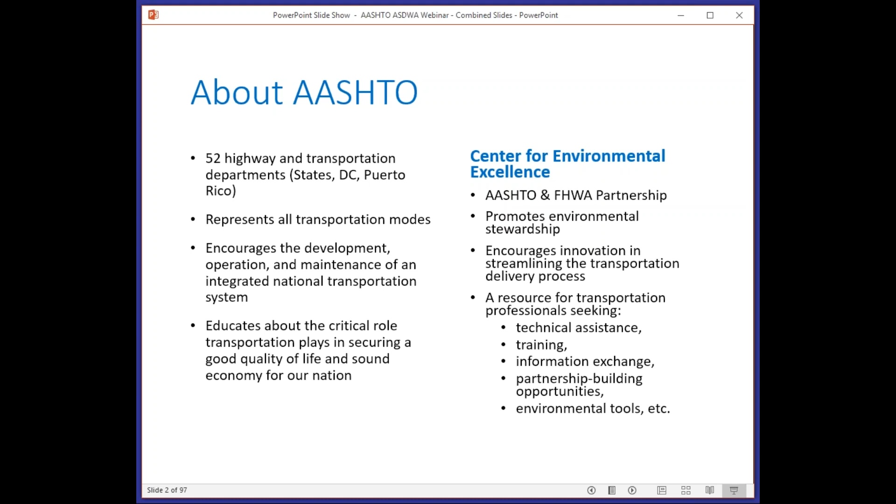The purpose of our webinar today is to provide information to state drinking water programs and state highway programs on how they can work together for mutual benefits, and also to share examples and specific information on best practices for road salt applications and impacts to drinking water.

Quickly running through the agenda for today's webinar: as we're providing this welcome to you all, an introduction to AASHTO, I will turn it over to my colleague, Deirdre Mason from ASDWA, to provide a similar overview of her organization. We're excited today to hear from Pierce Rigrod on the New Hampshire experience, and Caleb Dobbins as well from New Hampshire. And Lee Currey will provide information on Maryland's experience, and we'll also hear from Russ Yurek from Maryland as well.

From New Hampshire, we have Pierce, who's a supervisor, Drinking Water and Groundwater Bureau for New Hampshire Department of Environmental Services, and Caleb is an engineer with the State Highway Maintenance Department at the New Hampshire Department of Transportation. From Maryland, we have Lee, who is the Director for Water and Science Administration at the Maryland Department of Environment, and Russ is the Director of the Office of Maintenance for the State Highway Administration within the Maryland Department of Transportation.

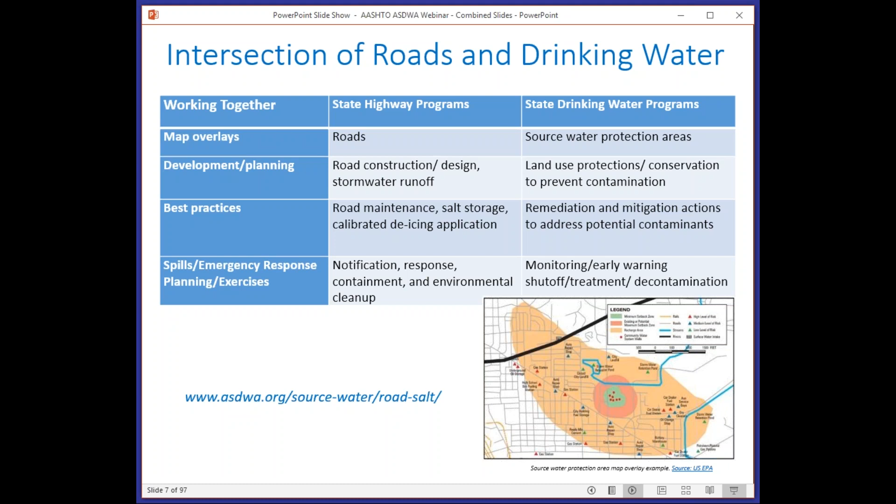This table is also in our handout and webpage and looks at road salt impacts using the multi-barrier approach to ensure safe drinking water. The multi-barrier approach includes source water protection, drinking water treatment, distribution system delivery, and community involvement.

I'm not going to go into details on these since this is what you'll hear from our presenters today in New Hampshire and Maryland, but please do check out our webpage that also includes additional resources.

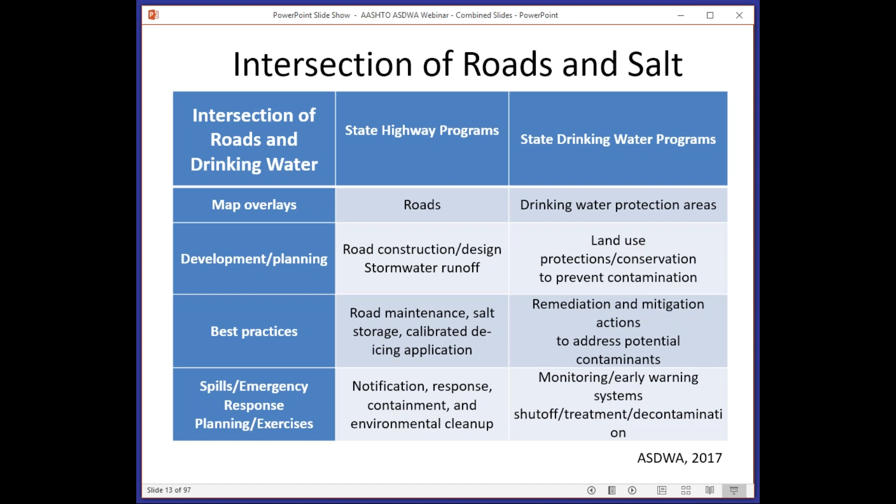So as Deirdre mentioned, there's a number of these intersections that take place that our Bureau and the New Hampshire Department of Transportation are already engaged in. We swap and trade map overlays electronically during project reviews. We're involved, to some extent, with road design and construction processes, and with local and municipal bodies that handle land use regulations applying lower salt or no salt zones near drinking water, on a voluntary basis. Best practices and spill control planning and exercises are also done, at this point in New Hampshire, on an as-needed or voluntary basis. But those are all things we touch upon to optimize our salt use and protection activities near sources of drinking water.

Next slide, please. Just to take a minute, we all know the impacts of chloride and sodium, from vegetation impacts to corrosion of appliances and infrastructure, surface water impacts, and in New Hampshire about 60% of our population uses groundwater. That's in areas with a lot of road networks, which can be even more of an issue in managing salt applications over winter and keeping chloride levels low.

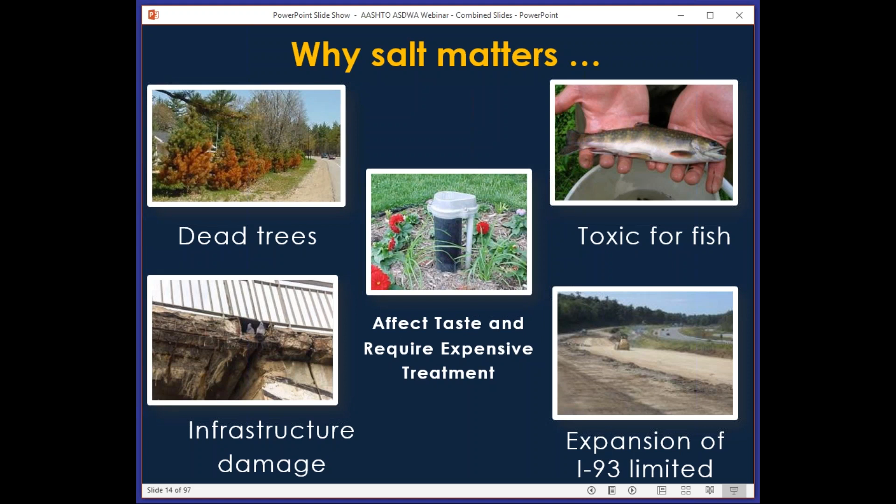Next slide, please. So as I mentioned, it's a health issue and a cost issue. For drinking water, we have standards and health advisories recommended by EPA, including 20 milligrams per liter for people at high risk or on low sodium diets. There are issues with taste, and having to implement treatment like reverse osmosis, which is expensive. Chloride is mobile - once it's in the water it can move around. And as I mentioned, it's corrosive.

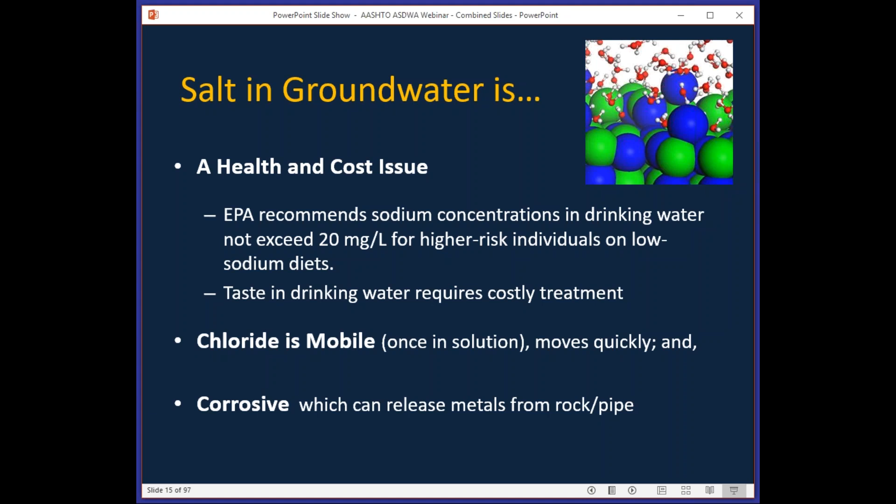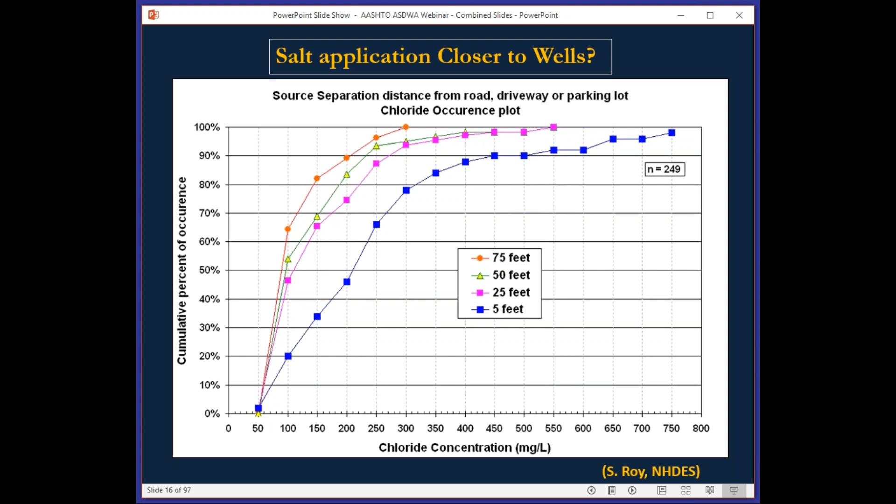Next slide, please. What we know, or think we know, is that as you get closer to a well or source, you tend to see higher occurrences and concentrations of chloride. The thing to take from this graph is as that curve moves to the right and the distance from the source diminishes from 75 feet to 5 feet, you see much higher chloride concentrations in terms of overall percentage occurrence. So the blue line to the right shows much higher numbers as you reduce distance to the source from 75 feet to 5 feet. So proximity matters.

Next slide, please. We can pretty much assure ourselves that the salt is generally coming from roads, but if you look at this pie chart, the takeaway is how big a role private parking lots appear to be playing in salt making its way into groundwater, with relative background levels in New Hampshire of sodium and chloride below 30 milligrams per liter. I think we've really got work to do in the private sector and commercial property, where parking lots are predominant and there's a lot of application going on. In the I-93 studies, that's backed up by work that DOT and programs at DES did, demonstrating that parking lots play a significant role in contributing salt into groundwater.

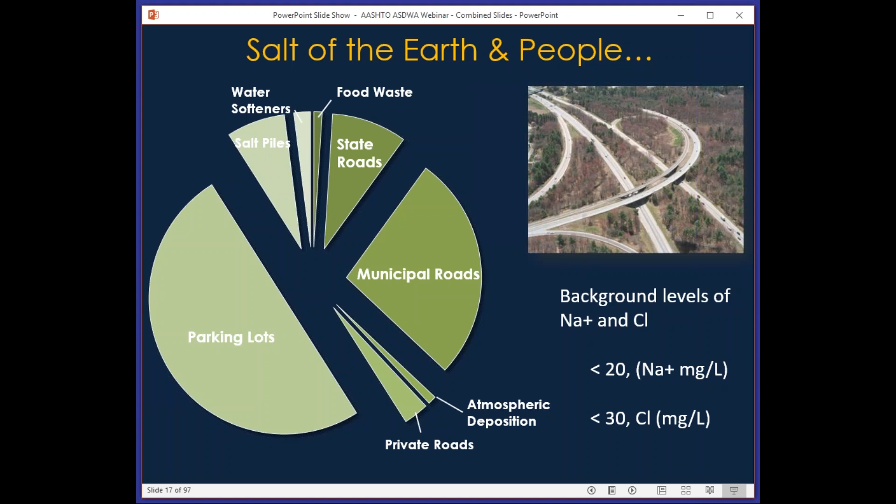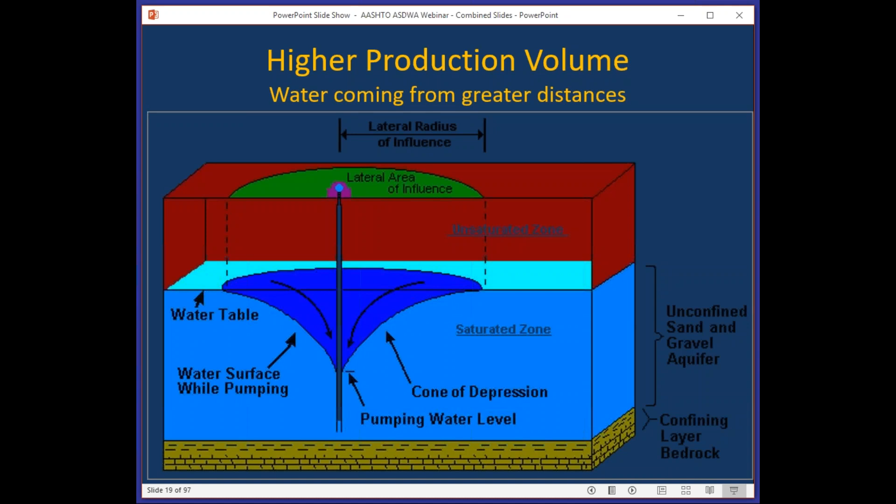to paved areas or to road projects, essentially. So way back in 1995, the Bureau responded to a request from DOT to put together some ideas and guidance on what we should be doing when DOT is working on road projects near a source. The Bureau published this document, which is essentially a series of tiered protections or levels applied to DOT projects. They're not altogether that complicated, but simply a roadmap for how project reviews from DES or recommendations from us during projects would take place. It's essentially a tool we use to screen projects as they come through DOT.

DOT has a fairly regular series of meetings and review processes that take place over a fairly extended period of time. So our recommendations, which include this and other things, go to them and to the project managers at DOT, who then take a look at them.

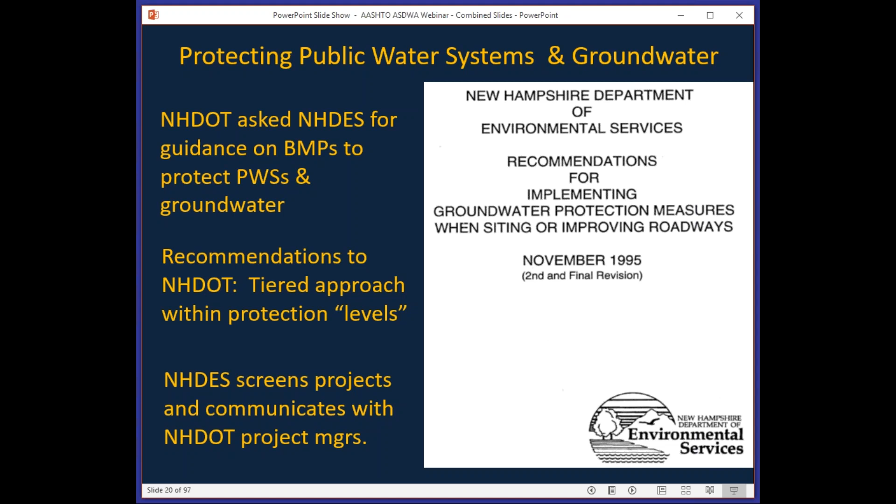I'm just gonna skip through here how these levels break out and try to give you a thumbnail about each one, given the time I have. So really, you're telescoping. Reading left to right, the levels are level 1 through 4 - they're broad, and then they narrow down.

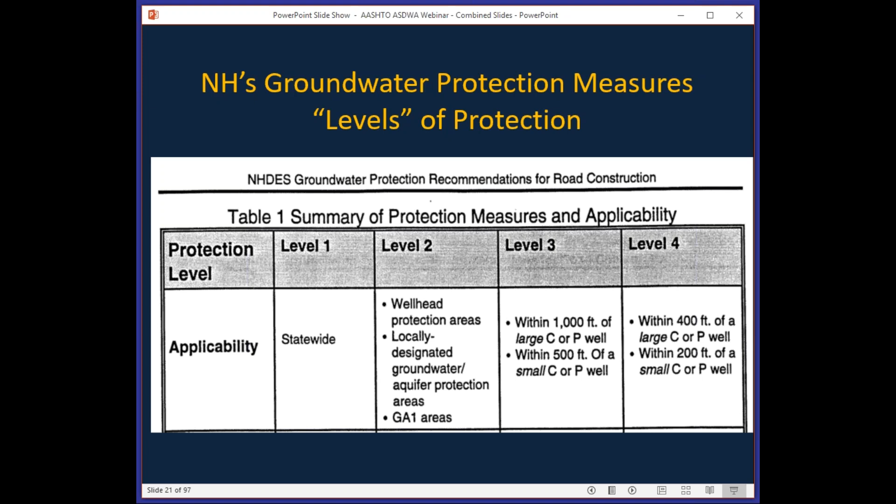The first is basically we'd like certain practices to be in play statewide, and then going to level 2, looking at wellhead protection areas, and then special areas that have been designated as important groundwater areas, and then level 3 down to specific discrete distances within which we'd like certain recommendations for stormwater to be followed, and then down to sanitary protective radii - essentially those distances that are the public health setbacks for sources.

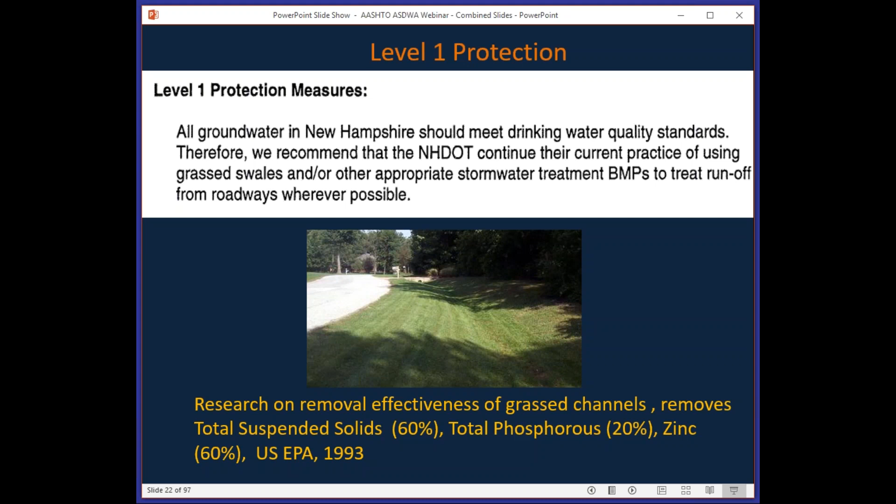Part of these recommendations, one of the initial statements is really just about feasibility. DOT does a lot of work - they're the largest landowner in the state, and they've got a lot of things to do. So this first level is basically, we know that many of the practices that they employ and others employ are already removing things that we don't want to get into groundwater. So for instance, this particular protection level is pretty basic. We're basically saying, use those appropriate stormwater treatment BMPs that you are using that we know work for a variety of contaminants. And of course, this is anywhere in New Hampshire, so we're looking at a very broad area.

Slightly telescoping down a bit, this next level 2 applies to areas that are within wellhead protection areas. In New Hampshire, many of our smaller wellhead protection areas are not particularly big areas - they're basically round circles that represent the estimated area that is contributing water to those wells. But larger community systems have pretty extensive wellhead protection areas that can cover a lot of ground.

What we've added to these, what we're basically recommending to DOT is to look at those most appropriate stormwater practices, which include the things that they already do, and then what we've grouped under something called non-structural measures. These are things like low salt, no salt policies that can be implemented, or perhaps technologies that can be put onboard trucks, but generally speaking, they're not structural. So the idea here is we're now looking at these areas that we know are contributing water to wellhead protection areas, but they may not be influenced at all by the practices going on because of the distances involved away from the sources.

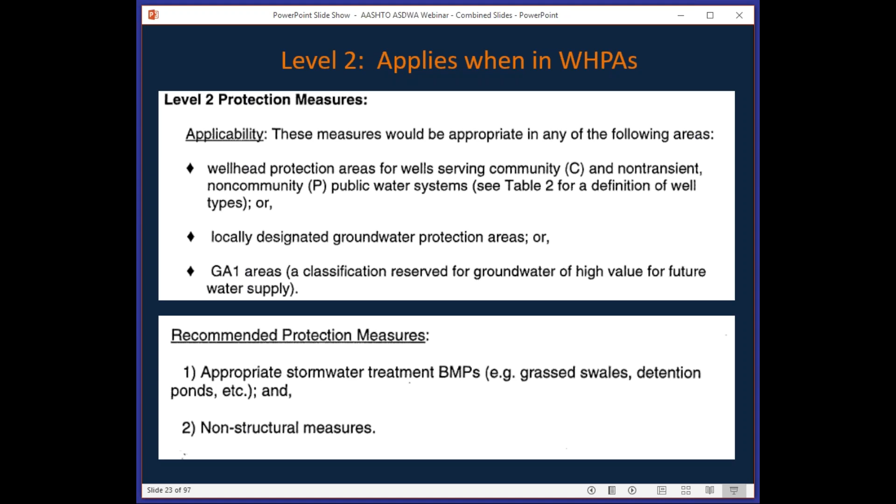We receive that information from DOT. We overlay the wellhead protection areas and the sources. They're color-coded, and it doesn't show it here, but we also know whether those sources have elevated sodium or chloride values that are coded in and change color if there's a higher value that is significantly above the background levels. So as a functional, mechanical process, we do this kind of basic review to determine the level and what recommendations we would be looking at, and then use some other ancillary data that goes into this sort of cursory review.

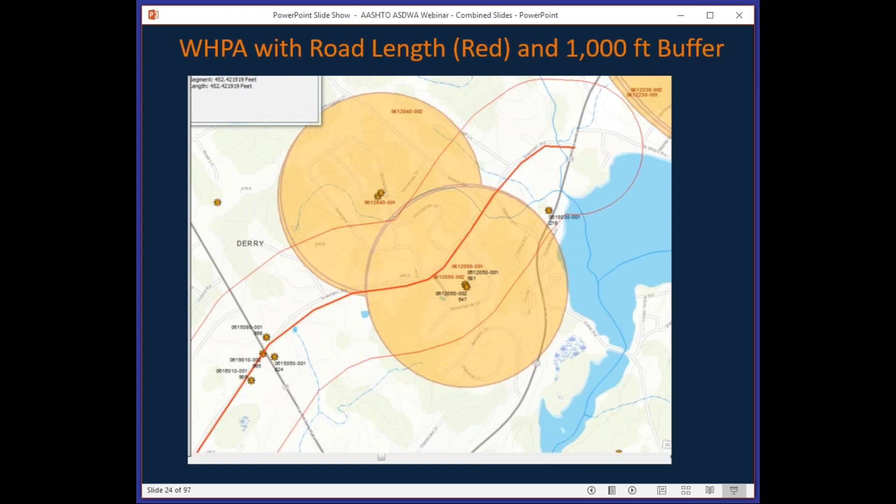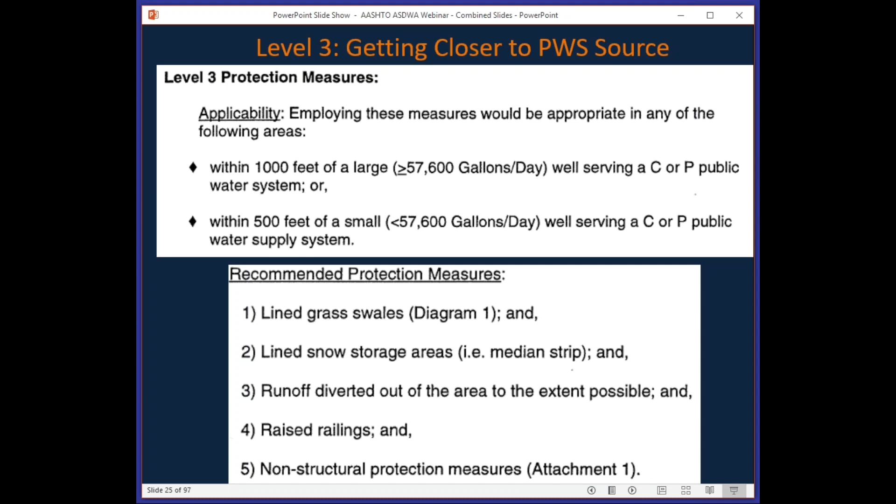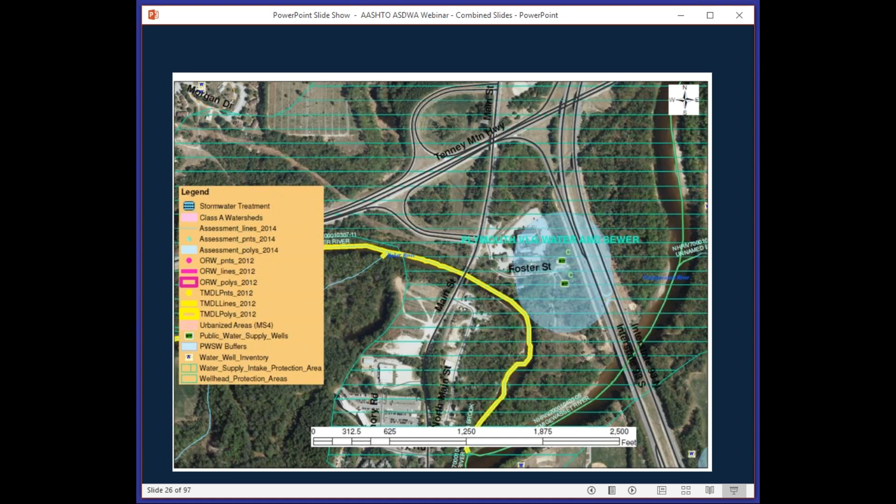DOT has implemented these smart ditch products, which essentially drain the stormwater coming off the main highway and move it out of the wellhead protection area.

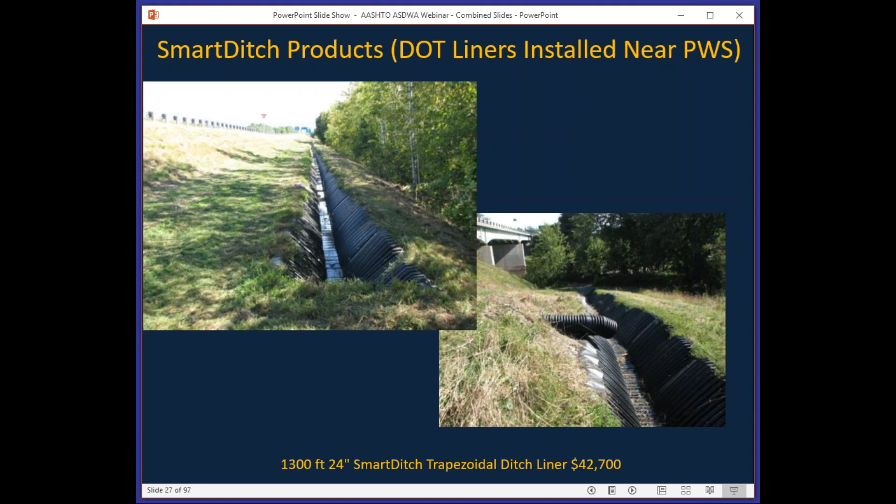Getting down to this close proximity to these large community or non-community systems, we're looking for closed drainage systems, raised railings, and non-structural practices. This doesn't sound all that different, except that the practices are closed. From a structural standpoint, we didn't have many other places to go.

We're basically looking for DOT, when feasible, to put in some fairly significant project practices that are not inexpensive. The underlying objective is that we're making recommendations they actually have a chance of implementing, without putting them in a financial hole where they don't have funding to actually implement.

In these cases we don't have a lot of these projects, since most of the newer sources approved by DES already have these setbacks built into them. So when these things do come up, it's typically with a new road project or an expansion, usually because it's an older well that predates the well siting rules at DES.

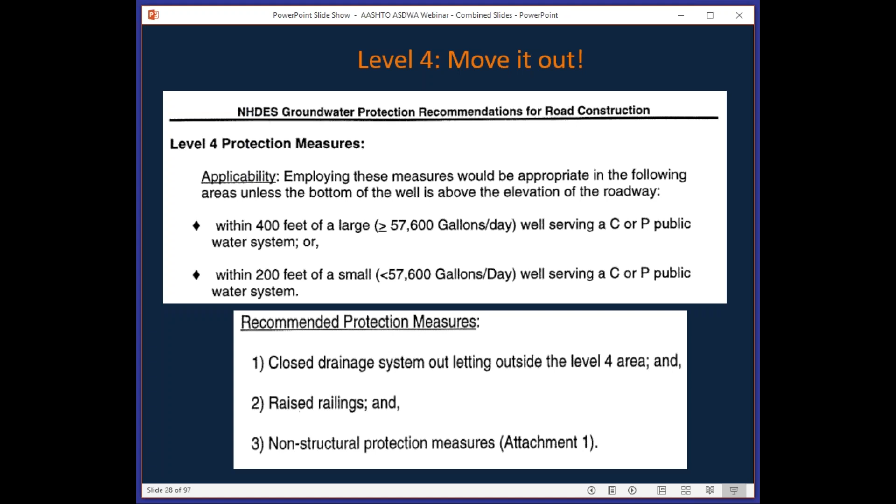Our source water protection program also advances low impact design. The idea is less pavement, less impervious surface, less parking. The design of those sites reduces the amount of parking or related paved areas where you'd see a lot of salt use. We want to move at the community level toward less area that we have to salt, as a strategy for minimizing future salt loading.

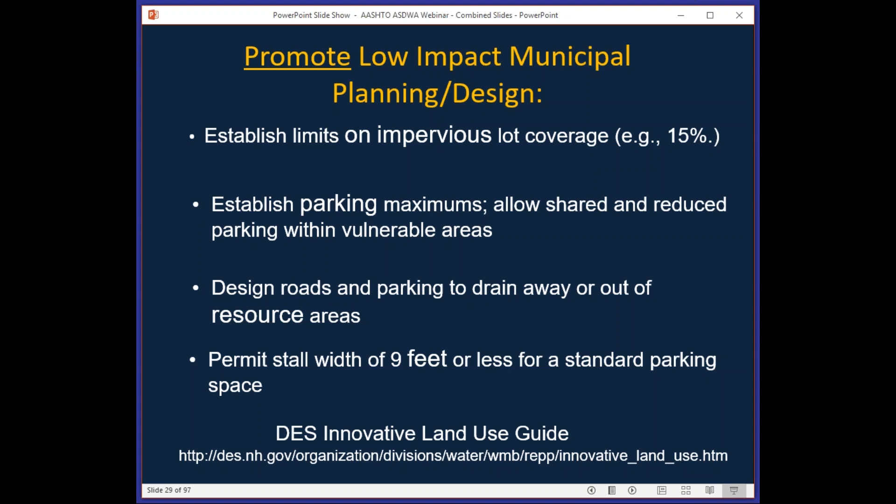DOT has gotten into the act as well. In this particular project in Concord, they've installed bioretention practices and reduced the pavement area draining water from the site. It's good to see the department taking that on, implementing it to both reduce contaminants coming off the site and reduce the need for salt.

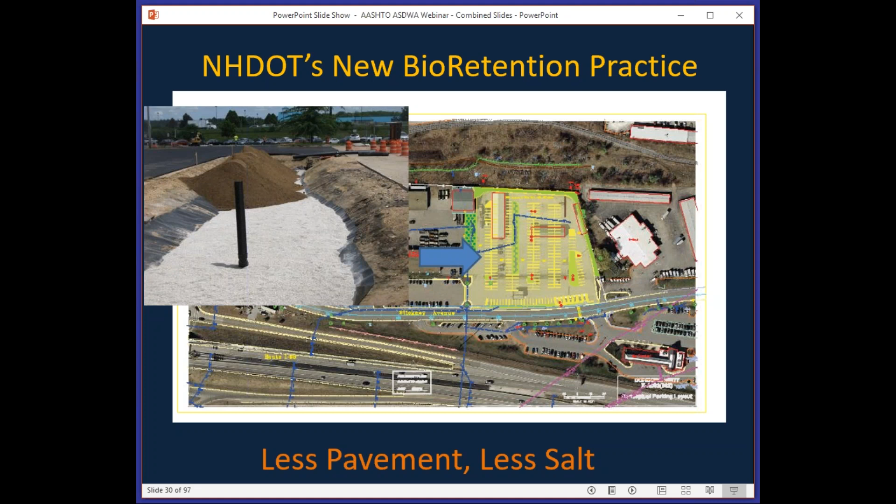I'm only giving you today a narrow window of what we're up to, given the time involved, but we work in a variety of areas with both DOT and others to look at roads and parking areas and how we can implement low or no salt policies, at both the state and local level.

Certain communities like Merrimack and others have adopted these policies, particularly around their water system and wellhead protection area. As I mentioned earlier, the design rules now in place have already built in protections for both public water systems and private wells.

We've been working with our permitting programs at DES for large projects to move stormwater discharge areas and practices further away from private wells and public water systems. We also have a number of pilots involving technology and onboard systems to better calibrate and track salt use as plows move around, to minimize overlap and salt use.

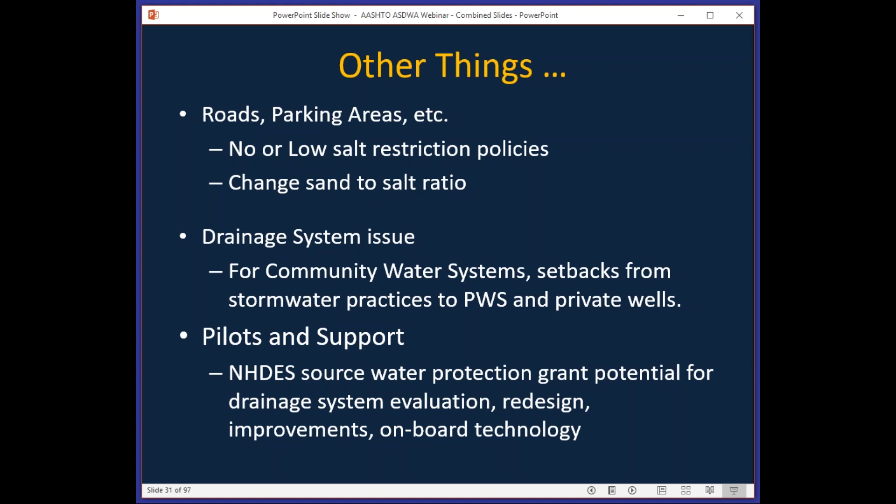And just getting close to the end here, DOT has many things that I'm not going to be able to get into, but we are aware of them and supported them in particular areas, particularly around I-93. It's a very big project, one of the biggest in the state, and has a lot of attention from a lot of stakeholders. DOT has been responding and piloting a lot of things on the I-93 corridor over the last 5 to 10 years. So there's a lot more on the table right now for New Hampshire to use and implement in order to achieve a balance, again, with both salt use and long-term quality of groundwater in New Hampshire.

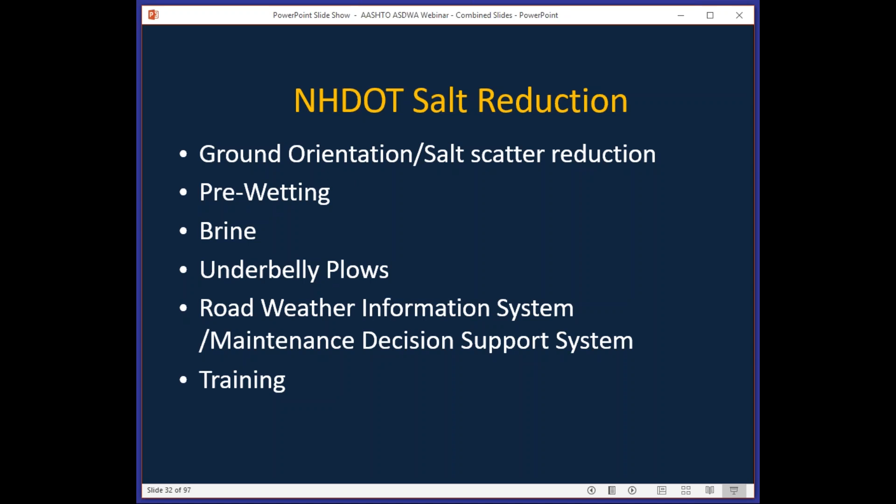Given the time, next slide please. I did put in the slide, but I think we're going to hold questions for now. That's what I have to open it up and lay out some of the issues. But if people have questions about the MOU specifically, the recommendations I've been focusing on in this presentation, I do have a PDF file I can share with the group.

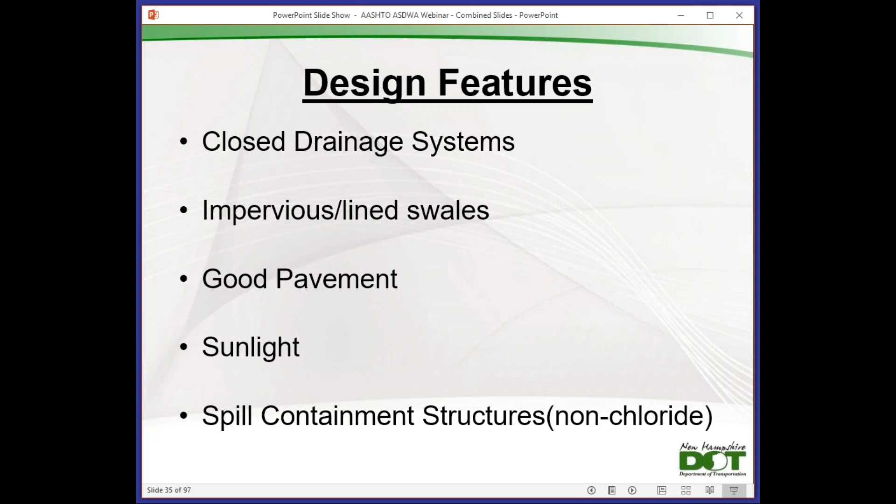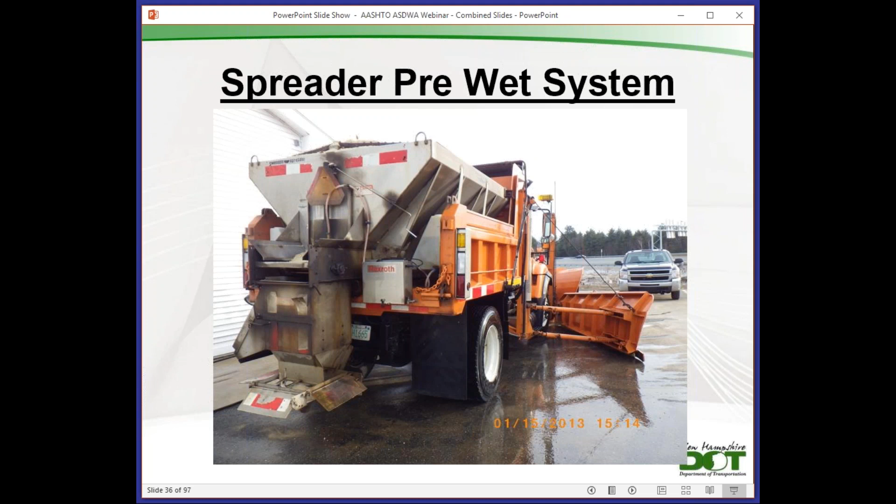So if we can have a reduction, as shown in this slide, which is the effect of pre-wetting your salt - wetting your salt at the spinner - what that does is it reduces the bounce and scatter so that the salt goes where you want it to go. It goes on the section of the roadway that the cars are traveling on, and doesn't go out into the shoulder. Michigan did a study a number of years ago, and it shows about a 25 to 30% reduction in the amount of salt that goes where it doesn't need to go. So that allows you to reduce the amount of salt you're using, so long as you're putting it exactly where you want it to be.

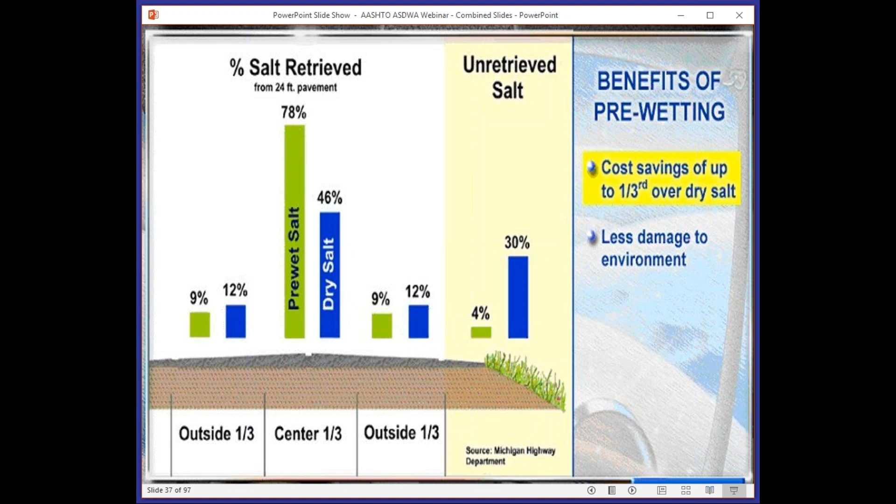In New Hampshire, our practice is not to salt our shoulders. We let Mother Nature take care of that the day or two afterwards, because we don't have the public traveling on the shoulders typically. So we don't have that material adhering to the road, and we don't need to put the salt down to keep the snow from adhering to it because the traffic's not there.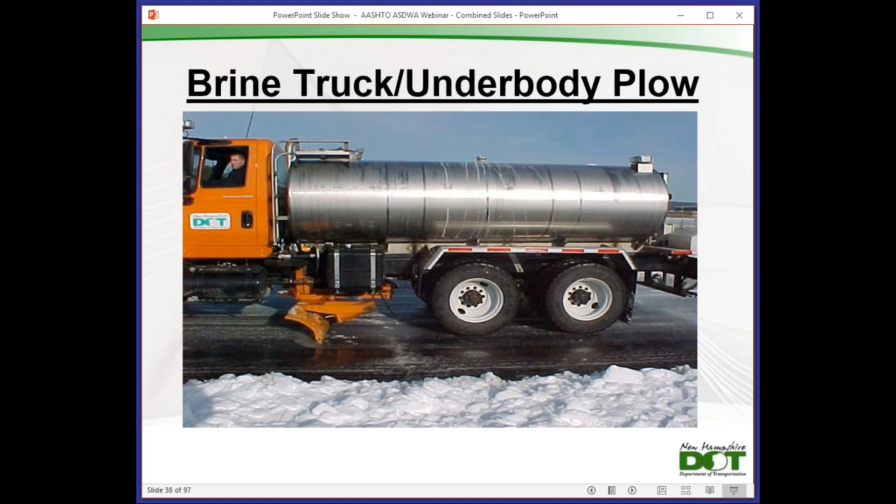This truck shown on this slide also has what's called an underbelly or underbody plow. That allows for an extreme down pressure. So if for some reason it doesn't work out with everything we do before the storm, this truck has the ability, due to the down pressure, to really scrape a lot of that ice off if it does happen to form, avoiding having to go and treat great thicknesses of ice by using chlorides.

Going down from the spreader to the ground, we've also implemented flex plows. There's nothing better than a smooth road to be able to plow, but in New Hampshire, believe it or not, we don't have a lot of smooth roads. So a number of years ago, we started using one manufacturer - there are multiple manufacturers now because people have seen the need and advantage of using these. It's a flexible plow blade. It's not like your wiper blade or anything, but it allows enough movement of the carbide inserts in the carbide blade so that it has some ability to conform to the road.

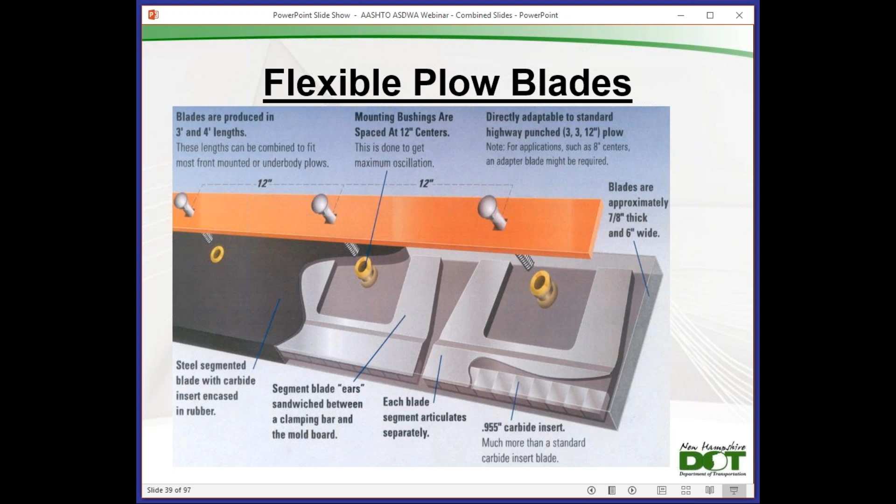The more snow that you can remove from a roadway, the less chlorides or salt you have to apply either during or after the storm. So these have actually been able to reduce our salt usage simply by removing more snow. And as I said, there are a number of manufacturers. Ten years ago there was really one manufacturer, and now I'd hazard there's probably at least half a dozen, if not more, with different designs that do exactly the same thing.

Back in the old days, New Hampshire was the first state in the country to actually directly apply salt to the roadway. We've been doing it for a number of years, and we didn't always use best management practices. As this slide shows, the pile on the top right is a salt-sand mix, from prior to straight salt. It was mixed in December, but it's now March, so that uncovered pile had been sitting out there for about four months. We don't do that anymore.

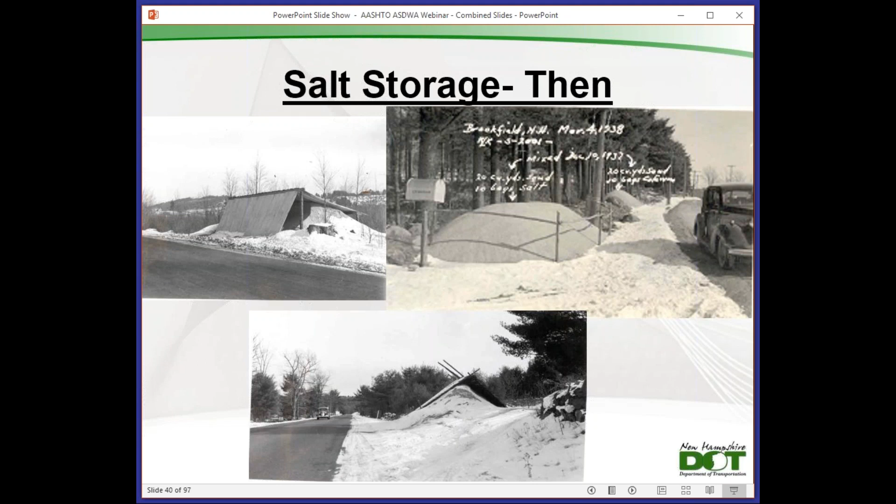This is what we do now. These are our salt sheds that we're building here in New Hampshire. Our goal, and certainly the MS4 and some other requirements coming down the line are pushing us this way, is to put an entire season's worth of salt at each of our sheds under cover prior to the start of winter.

Going back to that three-legged stool, this allows us to always have material on hand to safely treat the roads. It allows us to buy material when cost is lower, during the summer when there's more availability and less demand. And it allows us to reduce environmental impact because it's completely covered, and we can store it months in advance with no environmental impact.

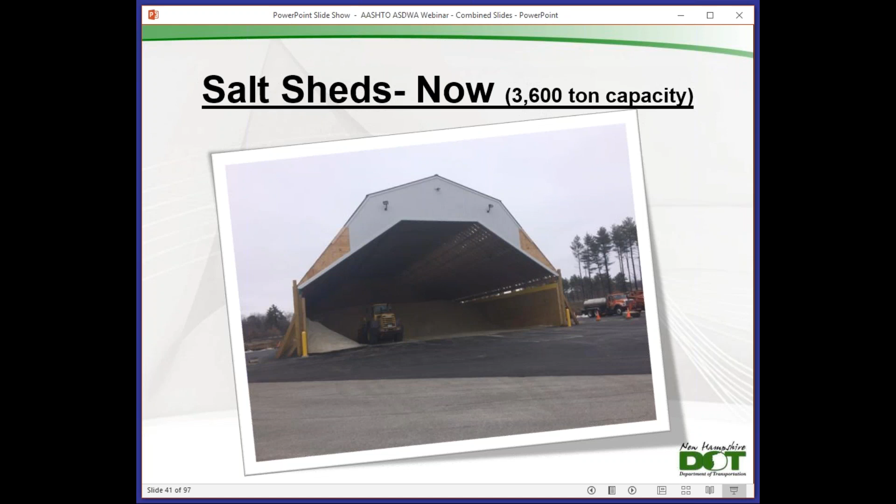This photo was taken in the summer, but as we begin to use the salt within those barns, we gain the ability to do our loading undercover during a storm. That helps with any salt that happens to get spilled at the yard—when it does, it's being spilled in an area that's already undercover.

We also implement what we call road weather information systems—basically weather stations located along the roadway. They tell us things like pavement temperature, air temperature, wind speed, and a number of other things. The newer ones also have a grip factor, which tells you the actual grip on the road, or how good the plowing is. These are important because they tell us what's actually happening on the road.

If you watch weather.com, it's telling you what's happening at like 5,000 feet. This is telling us exactly what's happening on the road, and it's also showing us trends because it's constantly logging data. So our foreman can see if the pavement temperature is starting to climb or fall, and adjust what they're doing according to what's actually going on on the roads they're responsible for.

Pierce hit on this briefly, but we also use AVL, automatic vehicle locating GPS systems. This does a couple of things—it shows you in real time what your trucks are doing. I can click on, on the trucks we have it installed, and see where they are, what their application rate is, whether their plow is up or down. Then at the end of a storm, it can show cumulative data—how much we've applied within a specific watershed.

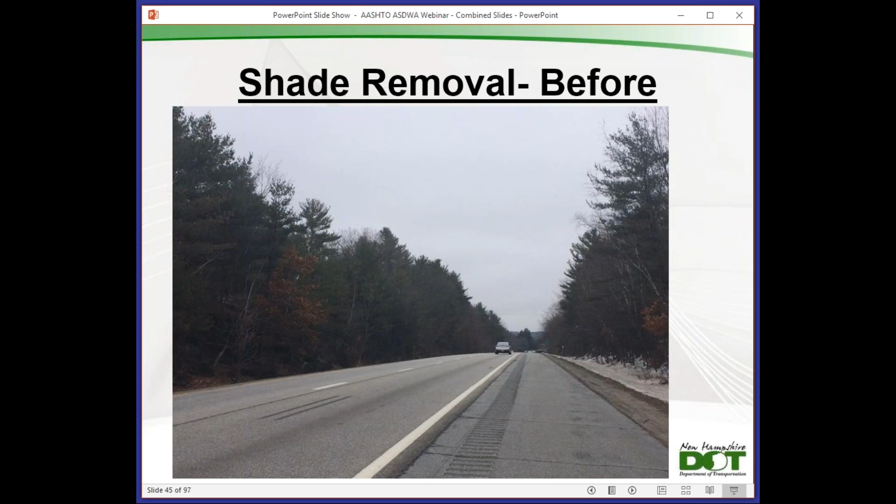And then this next slide is a little bit further down the road, where the section's been widened and the trees have been cut down. Some folks might say this is not truly scenic New Hampshire, but in terms of the chloride aspect, this does a number of different things. Number one, it gets sunlight onto the roadway.

The other thing is, when we talked about bounce and scatter earlier, with multiple lanes, even if there's a little bit of bounce and scatter from say the center lane, that just goes into the lane next to it. So it's not wasted salt—it just may not be exactly in the lane they wanted it. So there's some economy and reduction we foresee just from having more lanes out there. Even if there's a little bit of bounce and scatter happening, it's not actually going out onto the shoulders, it's just going into another lane. And as long as we take that into account when we do our application rates, that will be just that much less chloride we'll end up having to use.

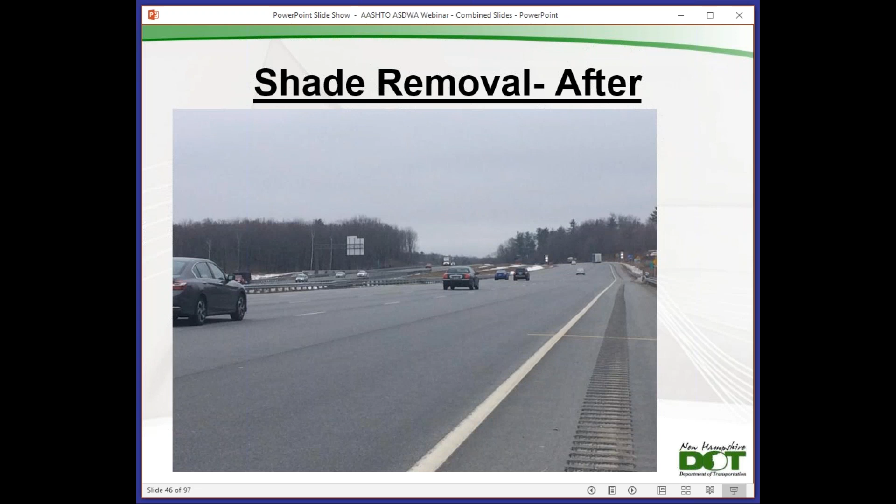Pierce had mentioned we do have a low salt and no salt policy. It's not used greatly, but it's allowed on our lower volume roads, so we look at it, especially in areas where there's some wellheads. There's one town in New Hampshire where we did a low salt right in the wellhead area that they have. Part of it goes back to that safety aspect - we want all the folks that are part of the municipality to be aware and agree as to what we're doing, which includes the fire chief, the police department, ambulance services, and the schools, because those are the folks we're going to hear from. If they're all in agreement and they meet the criteria, the department will designate it as a low salt or no salt, and we will treat it accordingly.

For the cost of 2 signs in this agreement, it goes back to the 3-legged stool in that we're able to reduce the cost of not having to apply it, but it does to some degree affect the safety, though it improves the environment. So it's trying to get all the legs of that stool to be fairly equal.

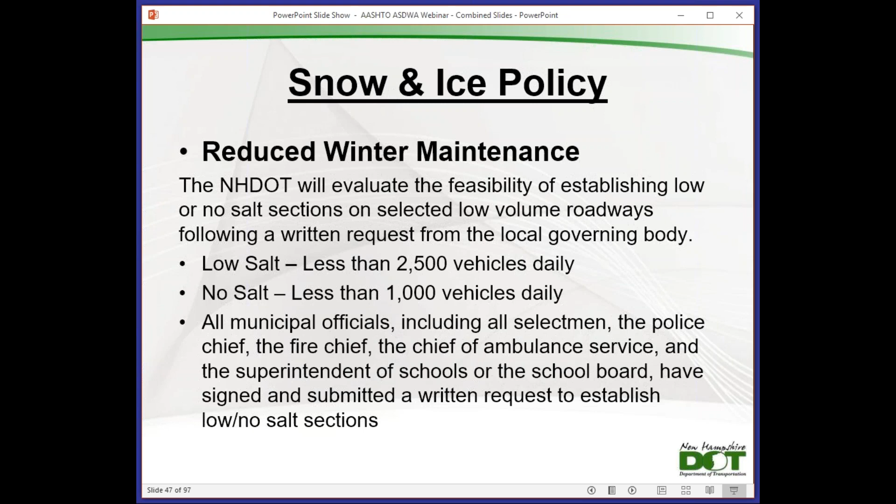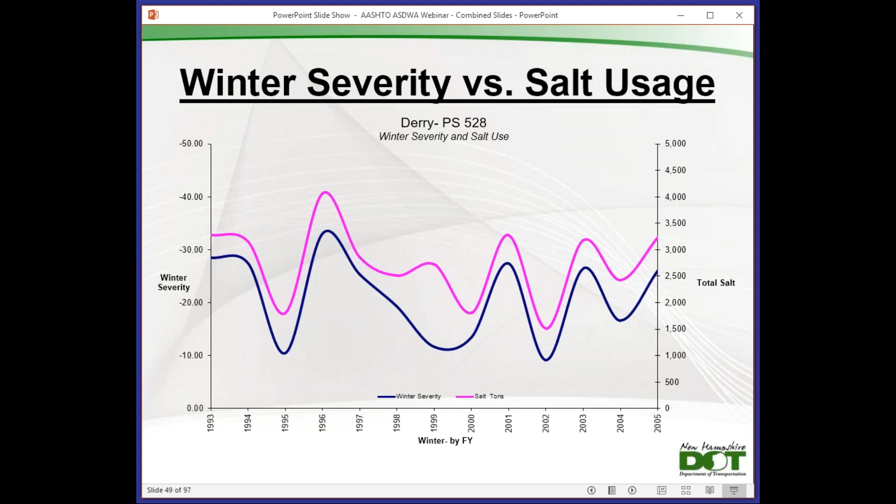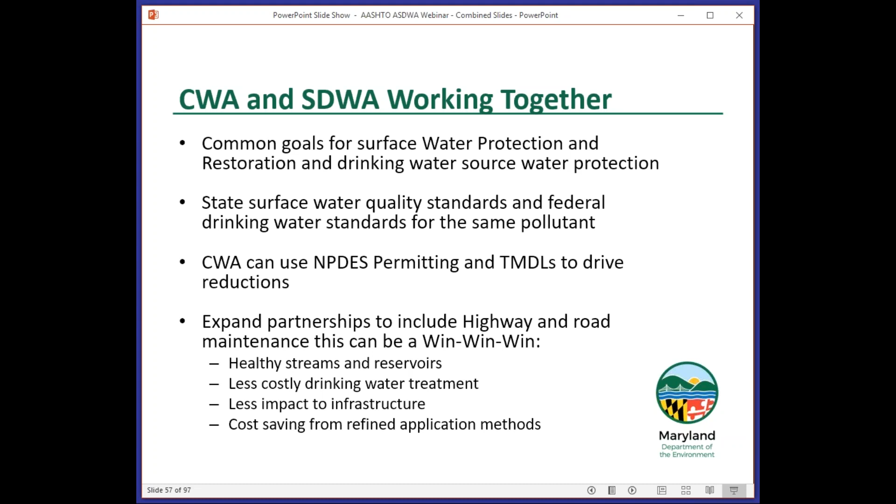Brief overview of the water quality standards. Pay particular attention to that chronic level of 230, and then also look at the US EPA secondary standards for drinking water, which in Maryland we have enforced at times, and those are very similar to the chronic level. So we're both trying to protect these water sources using very similar standards.

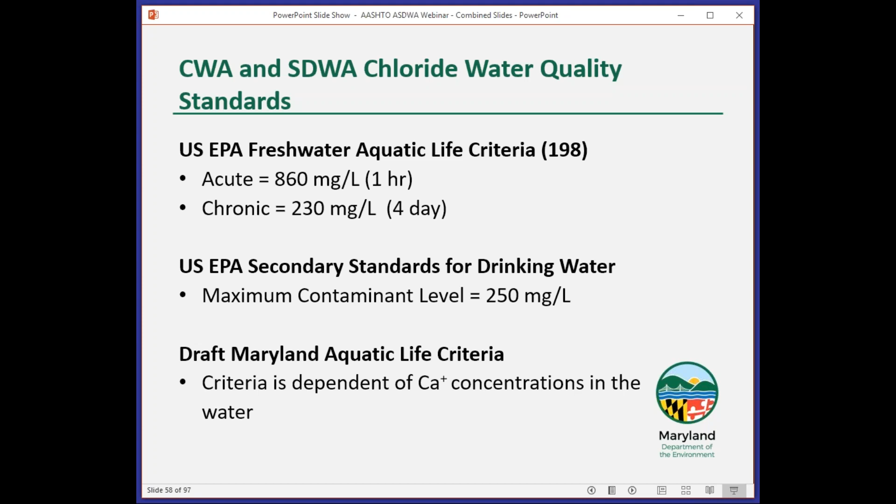Let's talk about some of the impacts in Maryland. You can see from this figure, the red shows our impervious areas, and you can see those highways branching out, extending north and south in Maryland. You can also see there's two large, highly populated metropolitan areas: Baltimore City, that northern piece, and then down you see a little rectangle cut out, that's the Washington, D.C. area.

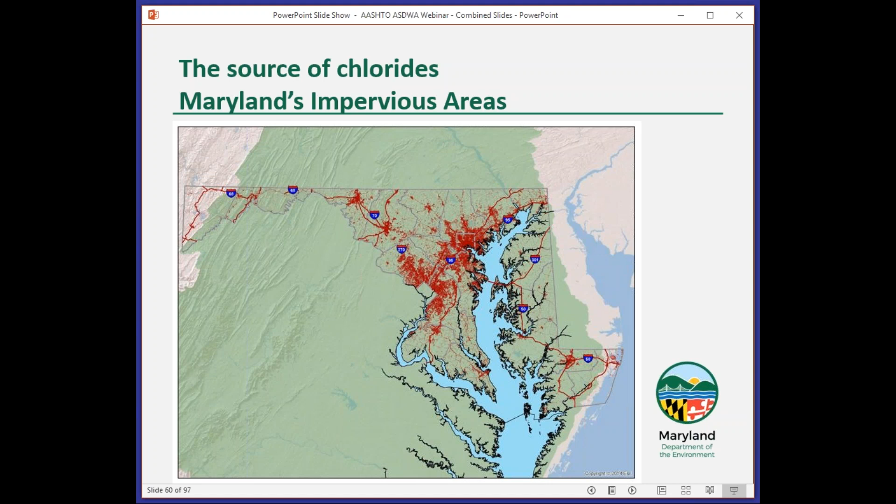In Maryland, much different than I heard in New Hampshire, 70% of our community water systems are actually served by surface water. We have several reservoirs located around the Baltimore region, three in particular. We have reservoirs around DC, and also the Potomac River that divides Maryland and Virginia, where a significant amount of our drinking water comes from. So it's important to recognize the differences when we look across the state on where we receive our water.

Keep in mind those urbanized areas I was just showing you, that red area. The Department of the Environment has identified certain areas of the state that aren't meeting their fishable, swimmable use - really looking at aquatic life impacts. What excites me about this map is I've seen State Highway, through the education talked about in the previous talk, show this map to folks and say, look, this is where we're seeing problems within the state. Maryland has 19,000 miles of streams, and it's important to recognize there are issues with salt impacting the fish. But salt can also impact the quality of our drinking water, and too much can cause some economic harm.

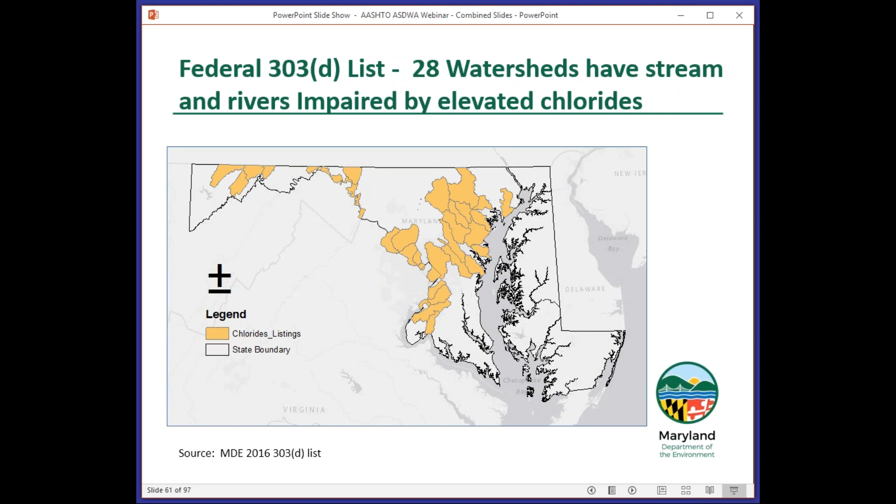When we zero in around the Baltimore area, that northern area I was talking about, this is one of the three reservoirs - it's named Liberty Reservoir. This information shows some of the trends we've observed. This dates back to about 1980, and the data extends to 2010. You see six monitoring stations of streams going into one of our drinking water reservoirs. Note the trends in chlorides - it was relatively flat between '80 and '95, and then beginning to see quite a significant increase.

If you look closely, you can start to see some changes between the 2000 and 2010 time period. But this is important because nonetheless, those trends are still increasing, and it's important for us to pay attention to them now and find smarter ways to manage our roads and clean up our streams and drinking water.

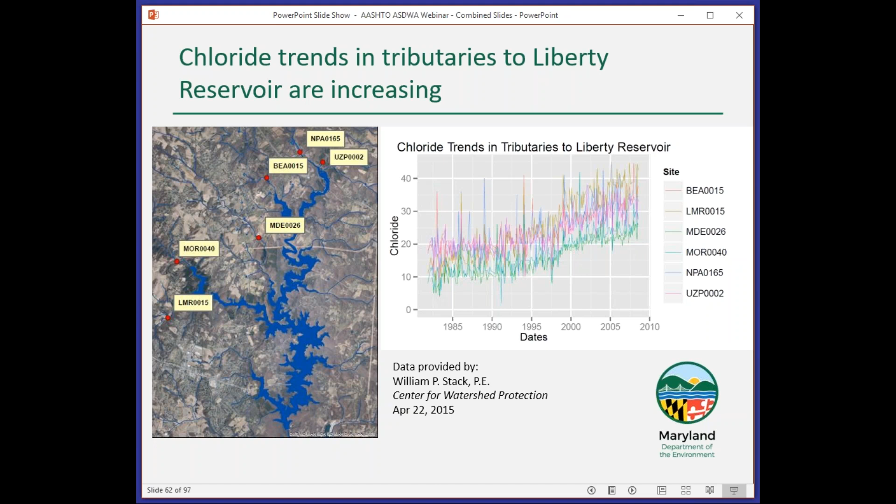So we're seeing these spikes, and I think some folks may think, well, Maryland doesn't get a lot of snow, but keep in mind we have a lot of freeze-thaw cycles. So as soon as we get snow, a few days later the snow's gone, the roads have warmed up some, and the next time there's a snow that comes, we need to again treat those roads, make them safe. So it's a very different scenario that I think Russ will probably talk more about a little bit later.

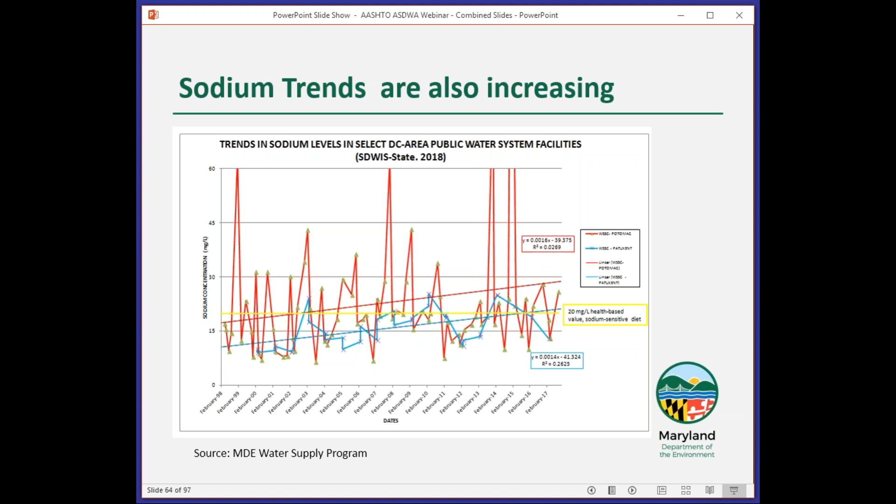Also, it's not just the chlorides. When you think about public health impacts and people on sodium limited diets, the sodium is also increasing. This is some information dating back to the late 90s up till today, looking at the Washington D.C. area public water systems. The red line is water pulled from one of our large rivers, the Potomac. You can see spikes through the winter time, but also an increasing trend. So it's a combination from a public health perspective, we're looking at the chlorides in the systems, but also the impacts for sodium and those on sodium sensitive diets. So those are two of the issues we're paying attention to.

Next. And then the potential drinking water impacts. We've talked a little about corrosivity and the fact that by reducing the salt, you can minimize some of the impacts to our distribution systems, thinking about corrosivity in pipes and what that means. Because of salts, there's an increased need for chlorine as a disinfectant. And then also, keeping those sodium levels low has important health impacts.

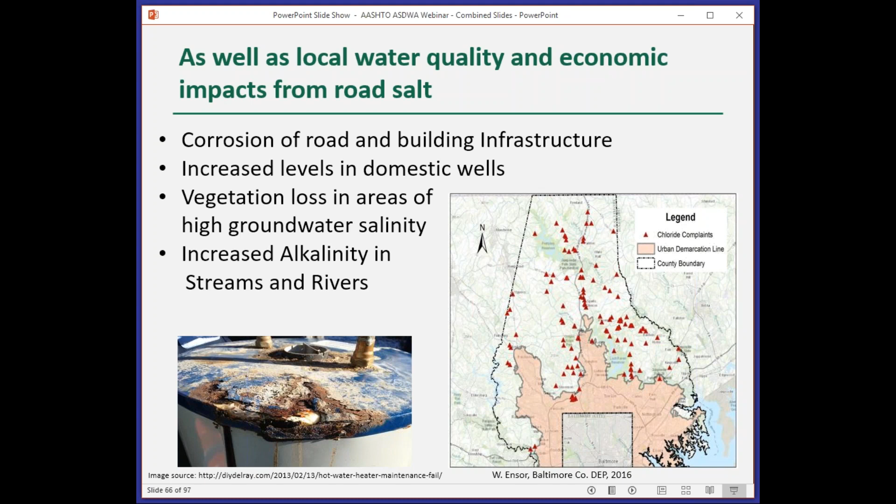And I want to point out one other issue, next please. This is one of our counties around the Baltimore City region, actually Baltimore County. What you can see are those red triangles - that's monitoring information or complaints from wells. This is a complaint from each property owner, and they're talking about taste, and also reporting complaints on their appliances. Again, another economic impact we're seeing and hearing about is people's appliances in their house rusting out sooner, rusting out earlier. So again, how do we manage this? How do we prevent this?

Next, please. So I wanted to go through that series of slides just to give you an impact of what we're seeing in Maryland, pointing out those trends we're observing in the drinking water reservoirs, noting that there's impacts to infrastructure, there's impacts in terms of economics in replacing appliances earlier and having to fix infrastructure earlier.

Then the question becomes, from an environmental agency, what are the things we're doing about it? And it's a little different from New Hampshire. I'm going to talk from some of our larger permitting applications and what we're seeing.

Next. So Maryland's approach: in 2010, our General Assembly, through our legislature, actually recognized road salt as an issue, and they passed legislation for Maryland to develop a statewide salt management plan. State Highway took that to heart, did excellent work, coordinated with us on certain issues and impacts related to water quality. Actually, there's a revised plan that was just put out in October of 2017 by State Highway Administration.

Again, monumental work. But also, within MDE, what we're looking at, and what you heard earlier, is education, education, and education. It's really about how you train folks, whether it's in highway departments, within certain counties, or what's happening in parking lots with commercial application. So it's a tremendous amount of education.

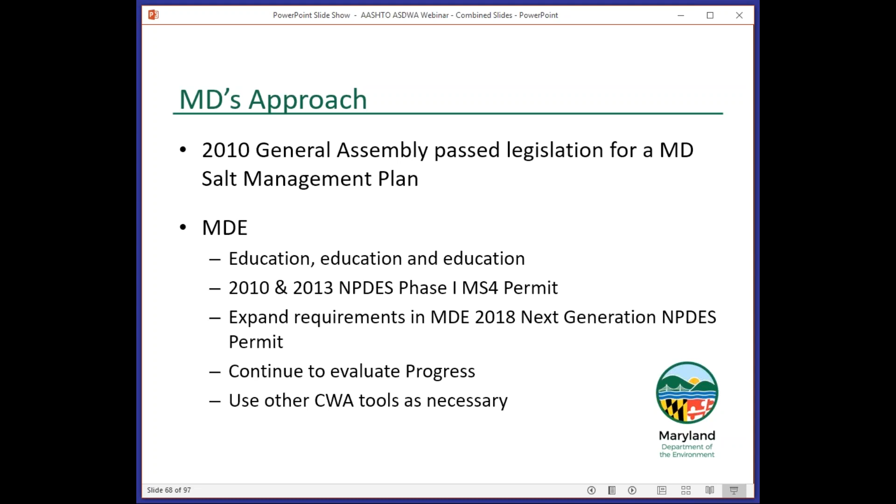We also have these stormwater permits, which I'll talk to you about in just a little bit, where we brought in requirements to understand what's actually happening out on the watershed, and I'll share some of those results. We're expanding those permits within Maryland to better address and go straight to implementation in terms of how we continue to reduce and make progress in keeping the roads safe but keeping the waters clean. And we're evaluating progress, and then I'll close with looking at some other Clean Water Act tools we can use if necessary.

Next. So you can go to the 411 on road salt - this is an MDE webpage. I think it's important to point out the related links, not just the information on road salt, but the salt management plan I talked about, Maryland State Highways, sensible salting. You can see there's a tremendous amount of information that we share. Every winter, we make an effort to go out and educate folks and make sure this is available to people in terms of the importance of managing road salt.

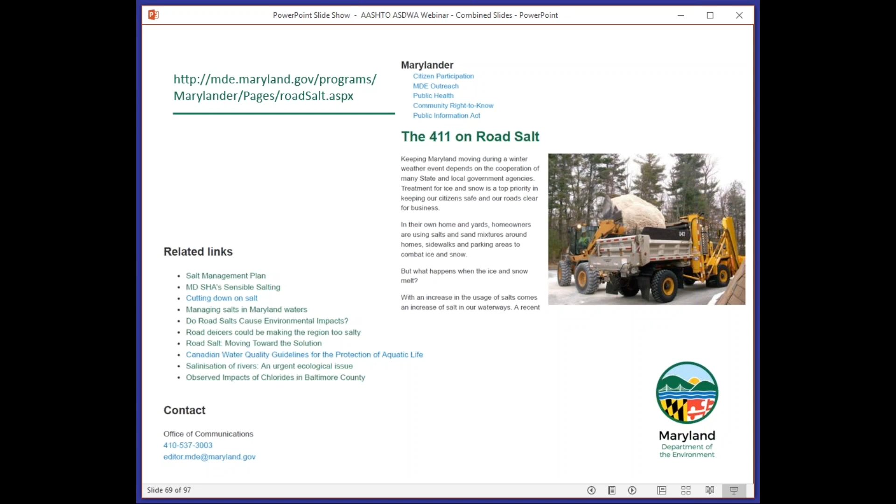In Maryland, our stormwater permitting is set up somewhat differently than other states. We have very strong counties in terms of how they manage land use and make local decisions. The shaded area on the map is covered by what we call an MS4, Municipal Separate Storm Sewer System permit. We have 10 counties covered by this permit, and one of the permit responsibilities is to manage and continue reducing road salts and de-icing materials. In addition, our State Highway Administration has a permit, and all the roads in Maryland under this shaded area are also covered under that same permit.

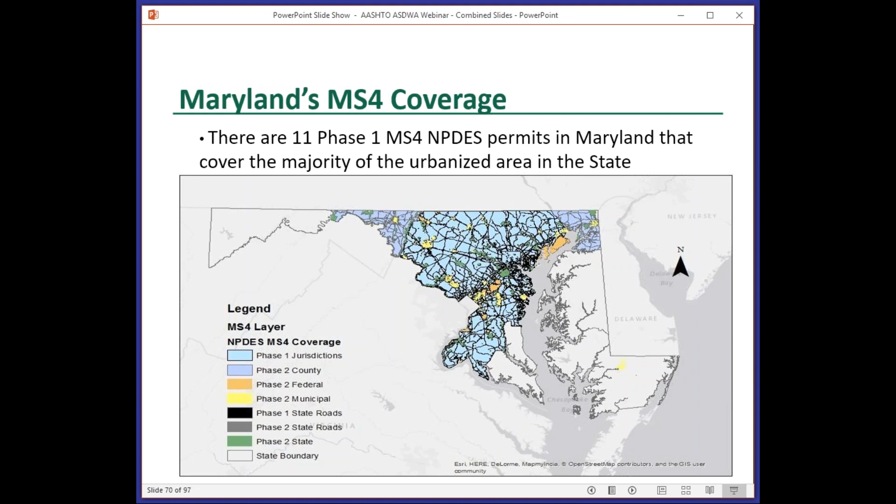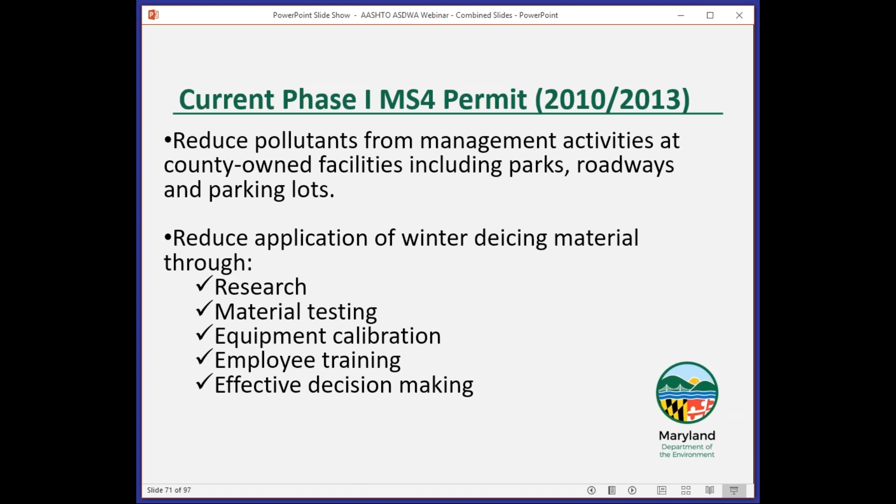I'll talk a bit about what's in that permit. The current permit requires reducing pollutants from management activities at county or state highway facilities, including roadways. One focus is winter de-icing material, which includes research, material testing, equipment calibration, and looking at new, better equipment to put down less salt while still emphasizing safe travel and safe roads. Employee training is part of this, not just for state highway but for all 10 counties covered by the shaded area. We feel all that results in more effective decision making.

I want to go back to Baltimore County and talk about some of their efforts. One thing they've done is start a snow school, offered annually to county employees and some contract employees, to make sure they're up to date on sensible, smart road salt applications. They're also doing a better job inspecting their roads and equipment prior to snow seasons, and piloting new technologies like the automated spinner talked about earlier. They're also reaching out to educational institutions, for example a community college that is now tracking its treatment of parking areas, reaching out not just to roadways but to community areas too.

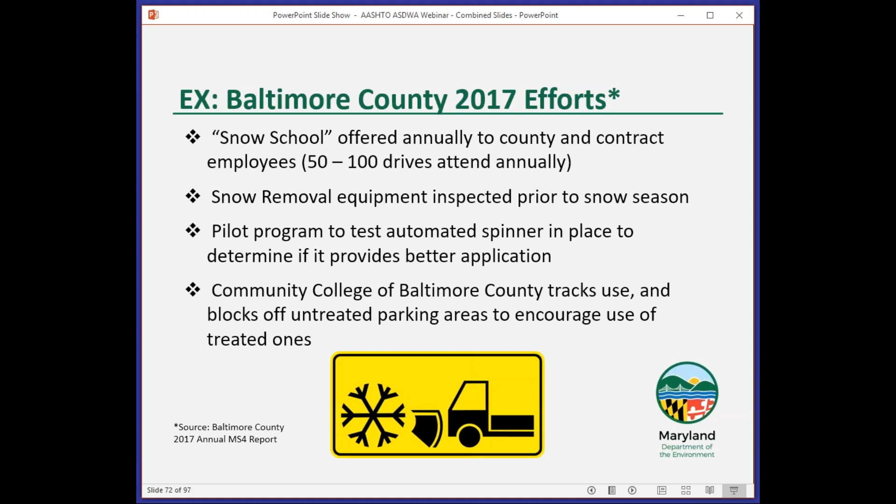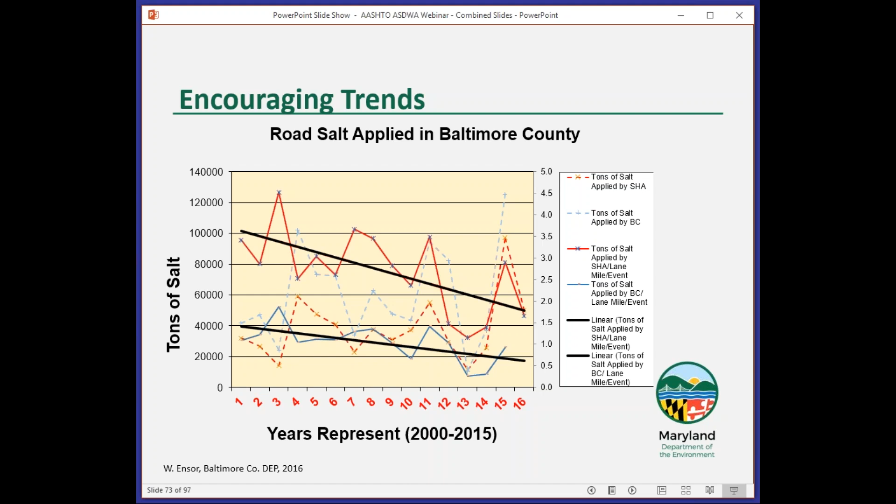And we're making progress. This slide shows a 15-year period starting in the year 2000. The line at the top is the State Highway Administration, showing monumental progress in reducing the amount of salt applied to roads while still keeping roads safe and cleaning up the waters. The line below shows what Baltimore County has been doing over the last 15 years, also showing a downward trend, which in our mind is positive as we keep pushing road salt application down. From my perspective at the Department of the Environment, that's so important for both our drinking water supply and protecting aquatic life in our streams, and it's also a cost savings for our highway department and maintenance departments in the counties.

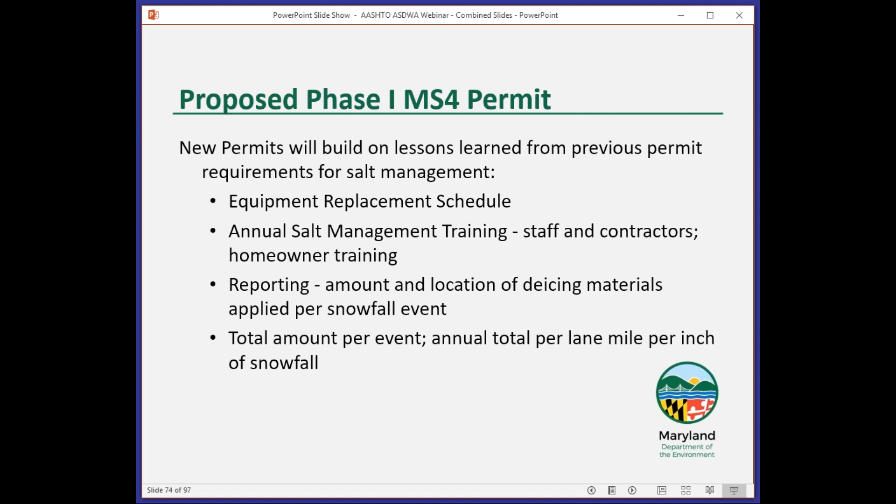We're moving to a next generation permit, emphasizing more requirements and learning from what we've done before to continue advancing how we manage and apply road salts. We're requiring an equipment replacement schedule - if a jurisdiction has just purchased new equipment, we need to be sensible about when it's replaced, but making sure replacements are new, better, up-to-date equipment resulting in more efficient treatment of roads. The other piece is requiring annual salt management training, much like Baltimore County and State Highway have been doing. Having information on what's happening is incredible knowledge for us - knowing what's going down in terms of road salts and equipment being used allows us to share it across road maintenance crews in counties and with State Highway. We're really looking to State Highway to communicate across these important permits and share their experiences of how they've changed and made progress toward road salt applications through smarter technologies and better management.

So what's next for the state in summary? The NPDES permit from a high level, that's what I wanted to share with you today. We have a next generation permit that has, in my mind, much more stringent requirements, but smarter requirements. I think it's things that make sense, not one or the other of safe roads versus clean water, but finding smarter ways to achieve both.

We're expanding State Highway's efforts, which you'll hear about briefly, into the other 10 large counties in that map I showed you, which covers most of the state and a large part of our population in Maryland. We're going to continue to monitor those efforts and identify and expand upon what works.

Again, we have to have the information to see what's happening in terms of trends. We can use other Clean Water Act tools, but our view right now is let's go straight to implementation instead of working on the path of a TMDL from the Clean Water Act point of view, that pollution diet you hear about. We think this is a great opportunity to show how it can be a stronger partnership and better solutions.

I think the partnerships, just to conclude with, really it's the Clean Water Act program and the Safe Drinking Water Act program, having those programs work together and continue to work together for source water protection as well as surface water quality improvements. Working with our MS4 stormwater jurisdictions, we feel that's a great opportunity to expand this, and that also helps expand to highway departments, public works, commercial, private.

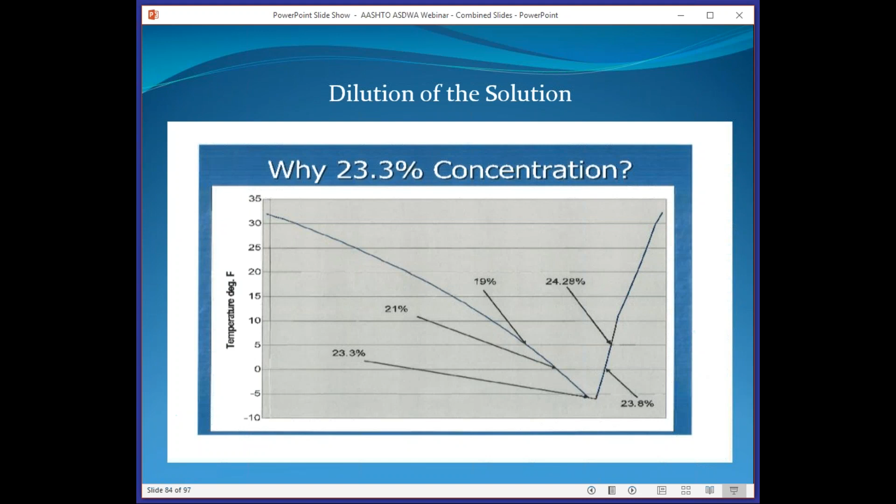So we're not only putting brine down before a storm, we also have about 10 different snow routes that are putting down direct liquid applications throughout the entire storm now. I wanted to give an idea of what that looked like, but if you can hit the next slide, I'll talk about a direct liquid application.

So we're migrating to increase the number of routes using brine only, and there literally is no granular salt being put down on those routes. We can get better control of the overall salt rates, which are considerably lower than most of our other routes.

For the folks here from DOTs or DPWs, if you think about it, typically we put the granular or dry salt down, and we hope we have enough traffic or the right conditions that that salt will somehow be created into a brine on the roadway. And that can take time—it might take a half hour, an hour, or longer. My challenge to you is, why not just cut to the chase and put the brine down directly on the pavement? Honestly, it creates an immediate impact and goes to work much quicker than the dry salt.

So that's—this is an example of some of our brine storage tanks.

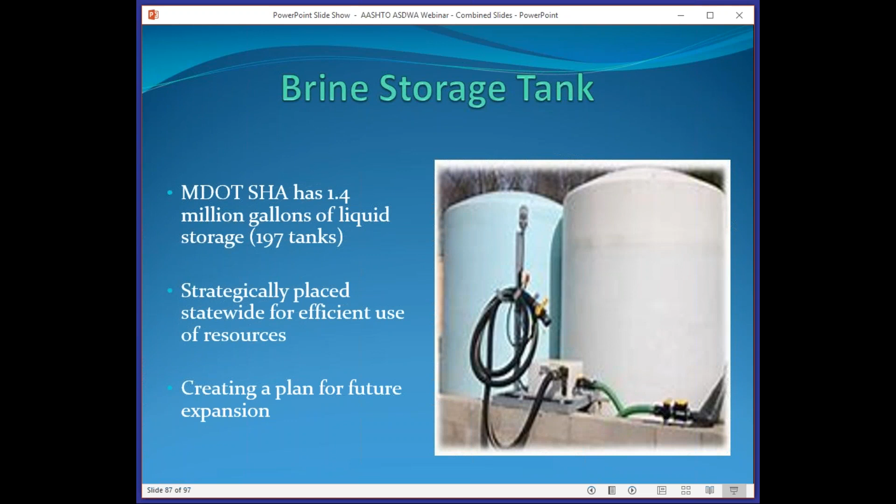At the same time, I've got to retrofit our fleet to put the brine down instead of granular. One of the other concerns we have is having water supply issues.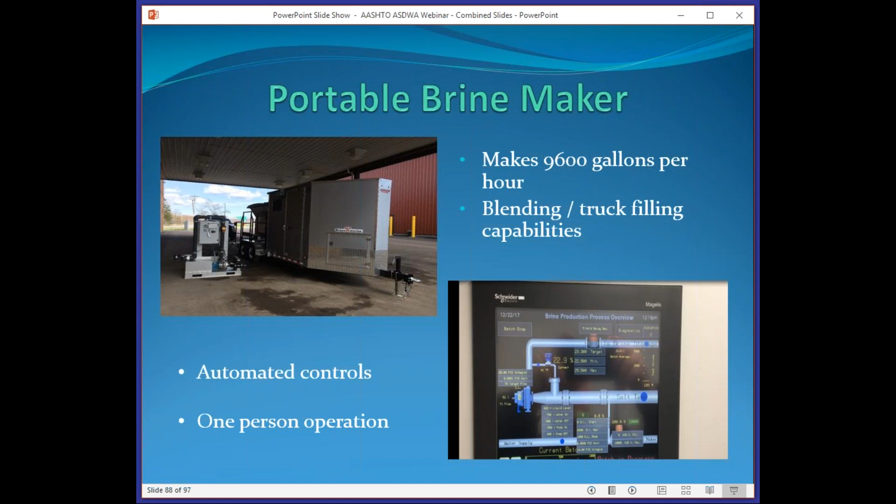Much like New Hampshire, we also have AVL and MDSS capabilities. We recently got AVL in 100% of our state dump truck fleet, so they now can provide data, not only real time and knowing the location, but it can also help with post-storm evaluations down to the truck and route level. It becomes the basis of watershed impacts, especially those considered sensitive.

We're working to better harness that real-time data into the MDSS system, which is intuitive software that looks at the pavement forecast and gives us a sense of how much salt we need to put down and when, based on the forecast we're facing.

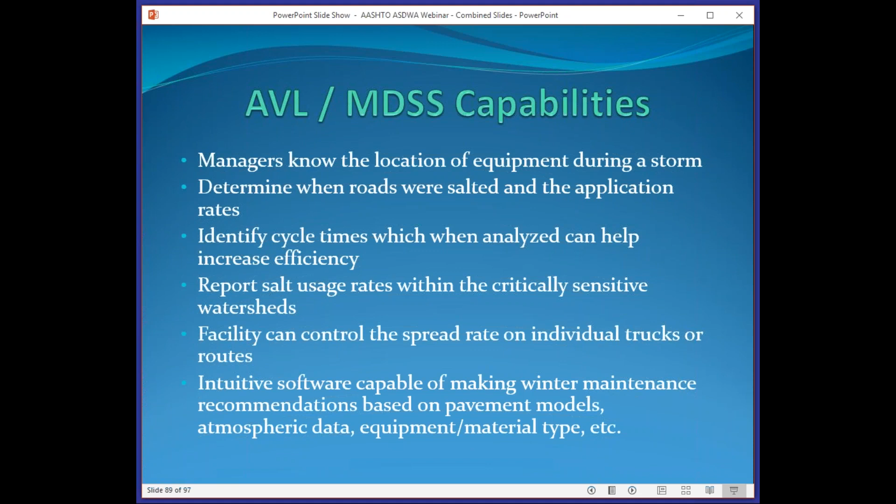One of the other technologies we've implemented is loader scales. We can track down to the truck level the amount of salt that we're putting on each of the dump trucks, whether state or hired. We currently have 12 of these, and we have roughly 114 loaders across the state, so it's a little more than 10% of our loader fleet. It's helping us manage our overall salt inventory statewide, and this should be very complementary to our AVL data.

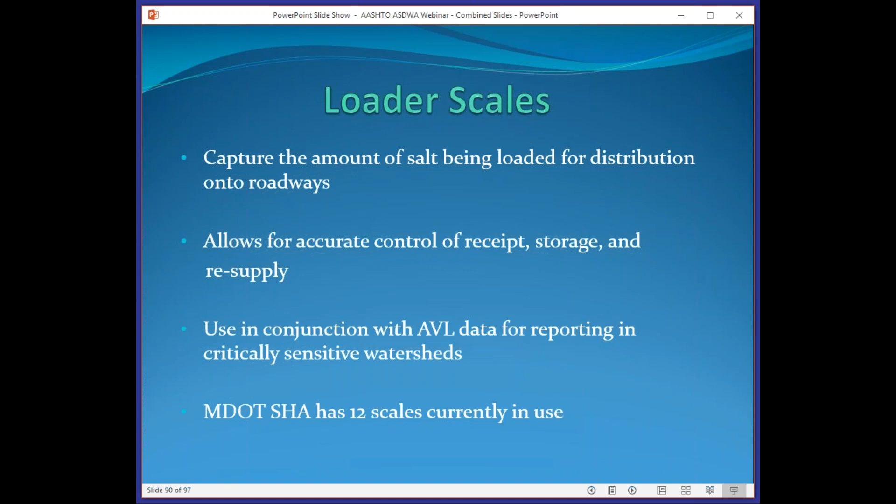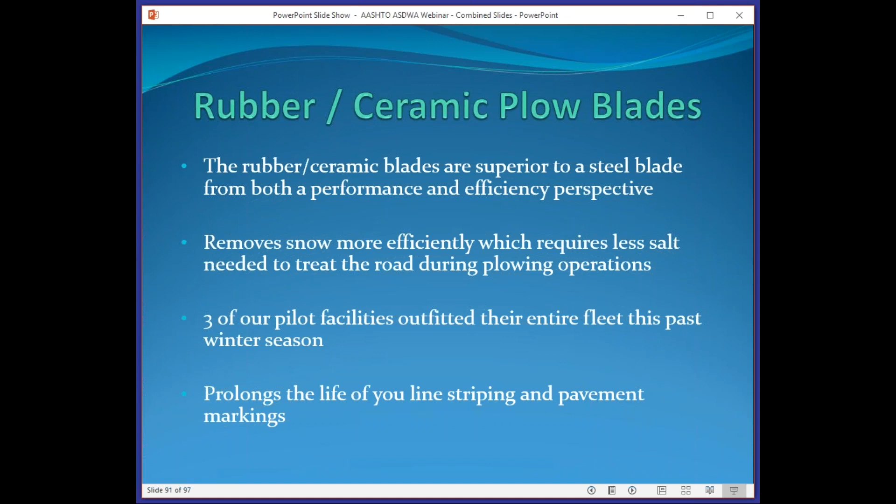Caleb alluded to the type of plow blades—we're slowly converting to rubber blades that have a ceramic insert. We have many roads that have some level of rutting across them, so if you have a straight edge steel plow, you're not cleaning out in the ruts. We're finding that these rubber blades with ceramic inserts have more flexibility, kind of like Caleb alluded to. The more snow and ice we can clean off the road, the less residual is left behind that we need to treat.

Lee talked about the salt management plan. We were legislated in 2011, and we're required to update it annually by October 1st of each year. I think he gave you a good idea of what it was about, so I'm not going to get into that any more than we've already spoken.

So what's it all mean? Our performance measures the pounds of salt per lane mile per inch of snow. While I sit here, I'm embarrassed to discuss our rates from years ago. I'm very happy to share that we've had a 58% reduction just over the last 4 years.

That's equated to about $11 million in savings in salt purchases, so we're getting much closer to the federal highway recommended rate. We're trying to get our numbers down under 300 overall. We currently are at the 420 mark, and we're hoping to continue this downward trend. I know that when we put brine down, it's going at 160 pounds per lane. If we increase the amount of brine we're putting down, it should significantly reduce our current number of 420 pounds.

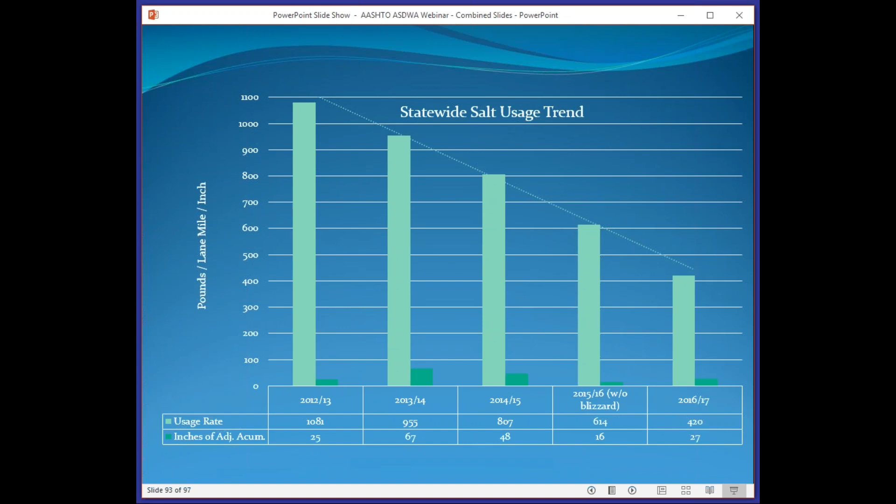So this is a little bit of a summary on what we've done to minimize our impacts. Just establish a clear understanding of what our level of service measurement is and what it means. More importantly, we have to temper the expectation of customers. That requires not just educating our folks to do the work, but we need to educate the public and elected officials on what we do and why.

Pay attention to the forecast not only before the storm, but throughout the entire storm, and make sure we pick the right application rate as storm intensity changes or as we're getting ready to exit the storm. We make sure all equipment, both state and contract, is fully calibrated. And the most important thing we can't stress enough to all our snowplow operators, both state and hired, is you must apply common sense to what's going on in your specific neighborhood related to that event you're fighting.

Next. I thank you for your attention, and I assume they may want to open it up to questions now that we're at the end.